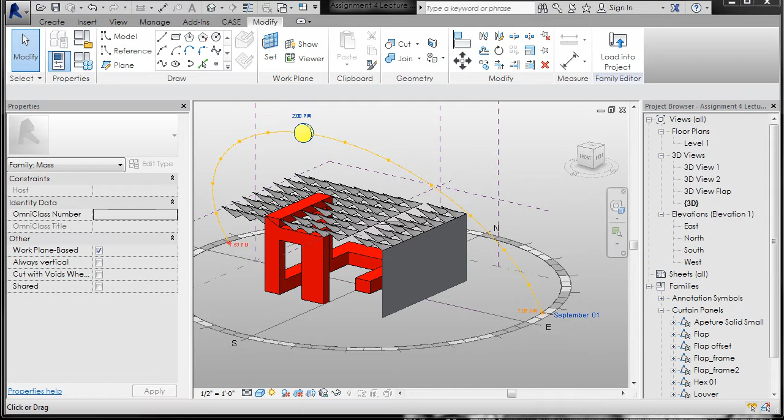So if I select this and go to select that surface, divide that surface, and we'll just divide it horizontally, then I can come into my patterns and I have a louver. Haven't made any types for this one yet.

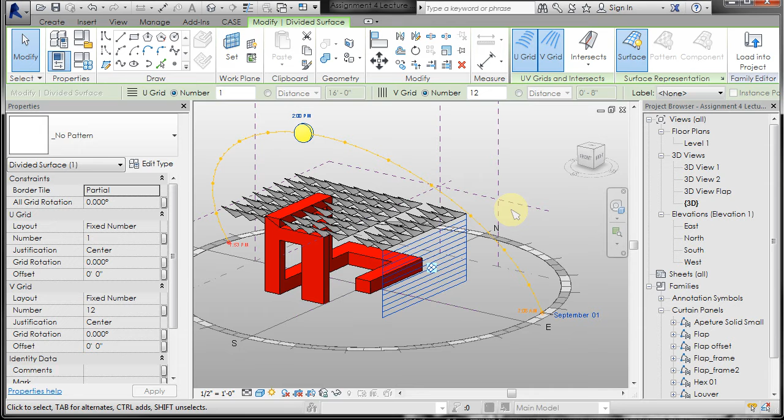And when it comes in, it looks real funny, right? Like I want that louver to go all the way across. And what's happened is it's actually 90 degrees to the way that I want it to be. So it's actually taking this little tiny louver and squinching it up.

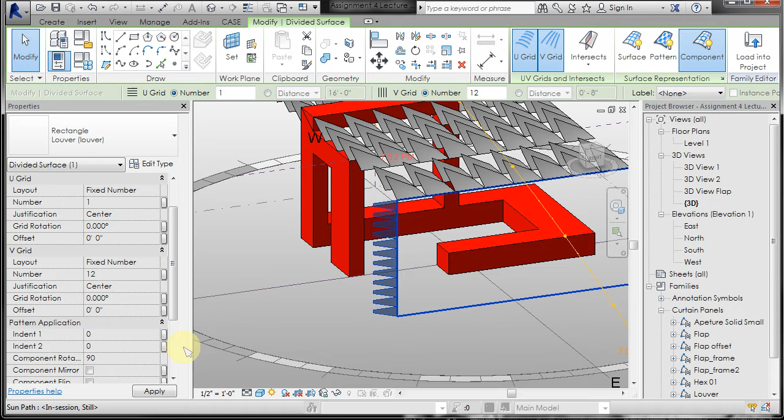But if you have a little faith, you can come over and play oftentimes with the rotation. So if I come into rotation and rotate that 90, you're going to see that that louver rotates itself from vertical to horizontal, and you get this louver rotation.

So if I go to my east elevation, right there is that louver. Let me turn off the shadows and maybe go to a hidden line, which will be a little easier to see.

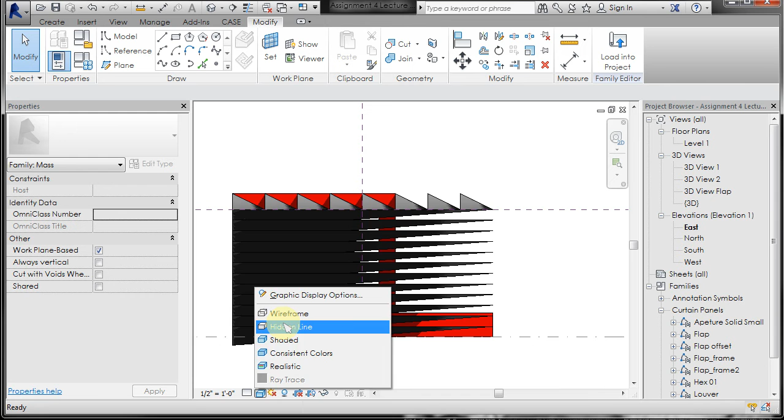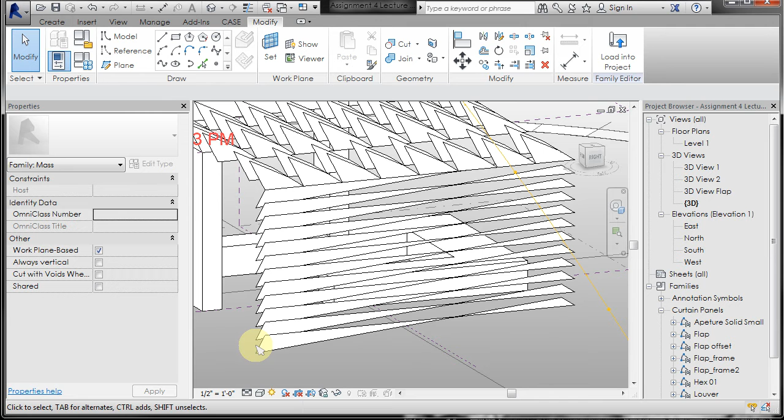So those louvers are spinning. Let's go take a look at it here, and let's go to wireframe, might be a little easier to see, or hidden line. You can see that they're flat here and that they rotate to there, so you're getting sort of the spin on them. So let's take a look at what those guys look like.

If I go to edit type, you see that we've got a -45 spin on a P2 and a 0, and then the length or the width of that guy, the length of each end is at 1 foot 8 inches. So let's hit cancel. Let's take a look at that louver.

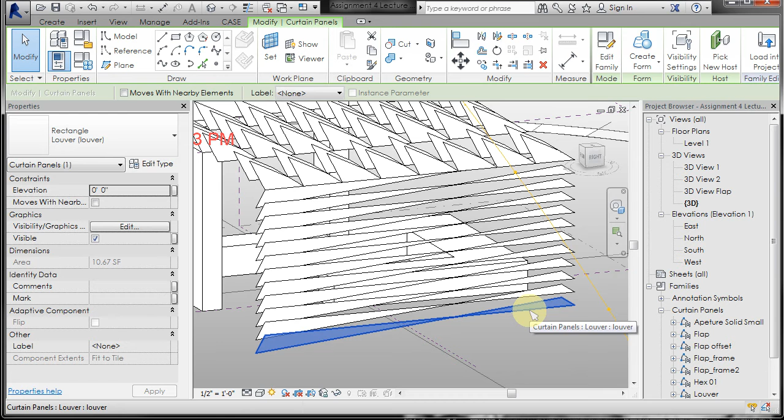So I'm just going to tab select one, right click on it, go to edit family, and it's going to bring up this louver family. And actually it's got a little bit more going on than a little bit.

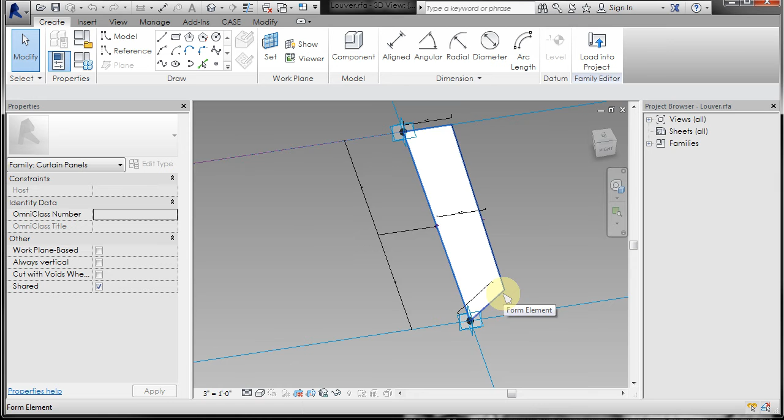What there are is there are two reference points that I've aligned to these adaptive points, and I've drawn lines on them, and you can spin those points by placing an angle parameter on them.

Okay, so I'm going to go ahead and let's just remake this guy really quickly. So I'm going to window around all the stuff and delete it. So we're back to scratch on our rectangle, okay, 10 by 10.

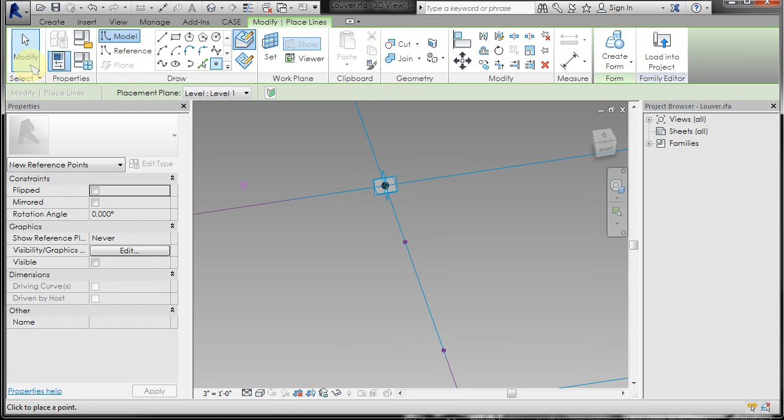So basically what I want to do here is I want to come in and host a couple of reference points on this line. Okay, so basically I got 2 points, right, that are hosted by that reference line, right?

So you can see they're stuck on that line. So what I want to do is I want to pick that point and I want to draw a reference line on it.

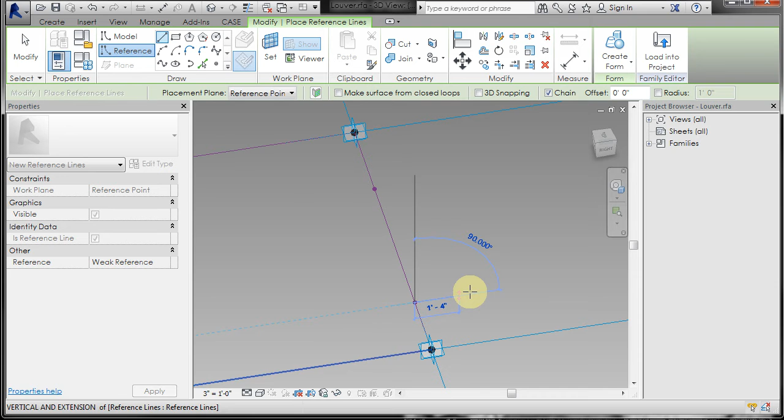And I'm just going to draw it out to the right here. That's not overly important which.

And I'm going to go to set that, and then draw another line out to there. I'm going to pick that line, make that permanent, pick that line, make that permanent, pick both of these.

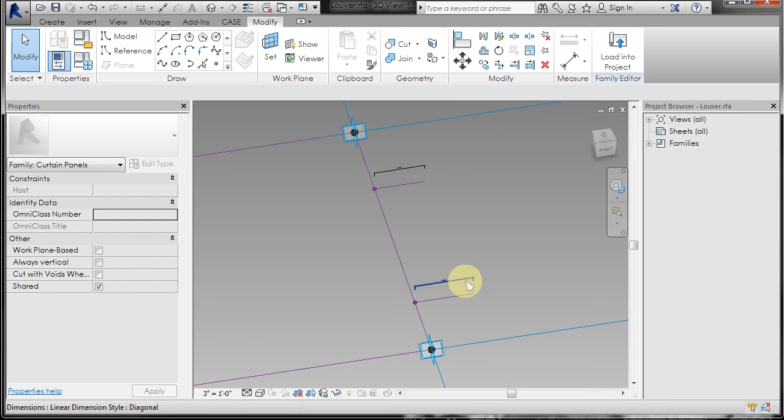And I already have the parameters in here. For length, you can add the parameter. If you don't have it, just call it L, but I'm going to go ahead and pick the parameter that I already have. And it's going to set both of those to that length parameter.

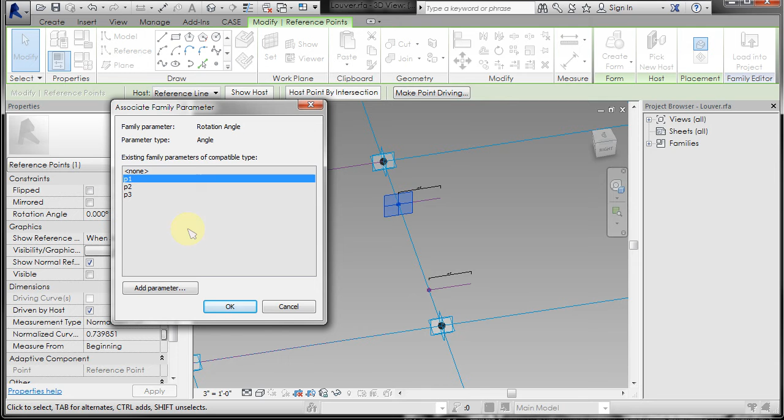Now, these points, if I pick that point, you see all the information it gives me over here. One of the things is a rotation angle, and there is an ability to set a family parameter to that. So I'm going to left click on it, and I already have 3 of them set up. If you don't, you can just click add parameter and give it a name, but I'm going to name this one P1. Click OK, and then I'm going to pick this one, set that rotation angle to P3,

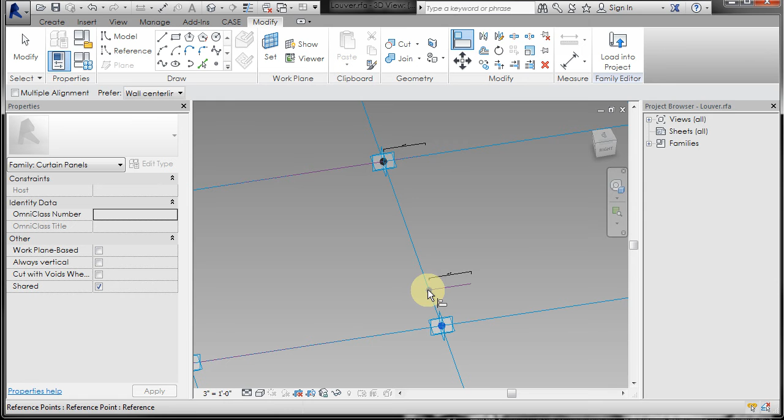and select OK. And then what I'm going to do is align to that point. And I'm going to align to that point. And now I can go in and pick those two and create form, select just the surface, and then I can go in and sort of test these guys. So if I want this to be 2 feet, I can apply those, go out to 2 feet.

I don't have P2 applied to anything, so I'm going to set it to 0, but what if I set this to 35 and apply? You can see that that spins 35. And if I set this one to 25 and apply, you can see that that's spinning to 25. So if I wanted to go negative, I can just hit negative 25 and apply, and negative 25 and apply.

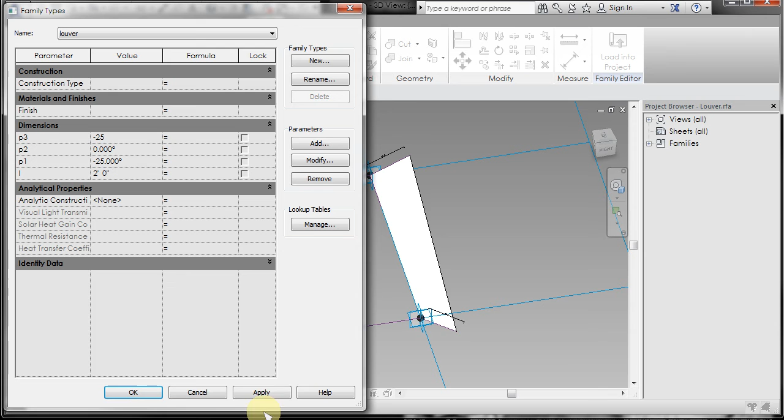Now one thing's a little weird. If I set this to 89 and I set this to 89 and apply, you see how it goes underneath? If I go to 90 and apply, it spins it all the way vertical. So somehow there's some kind of mirroring going on. So if you get into trouble between 89 and 90, then set it at 89.5 because it does some kind of odd stuff with that. So I tend to stay away from 90 if I can help it. But we'll take 0 here and apply.

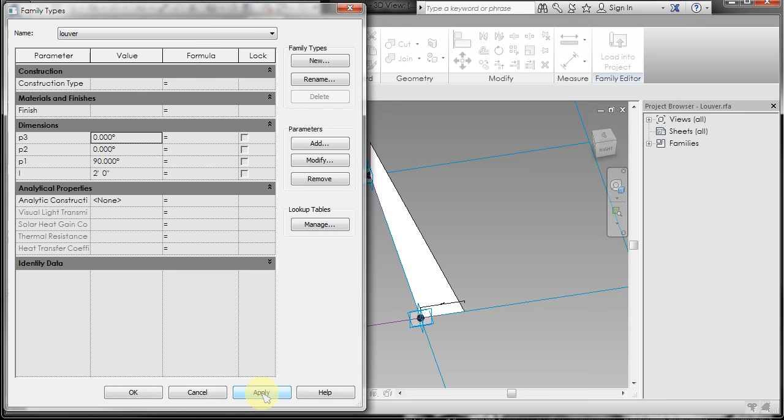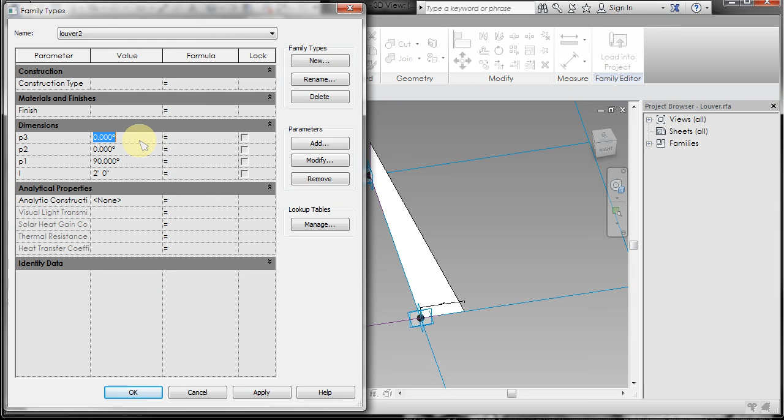Okay. I have louver up here just as a basic type. I could make a new one and call this Louver 2, right? And maybe set this one at 45 and apply. And maybe make it 3 feet. Apply. Click OK. Now I could set a material parameter and a whole bunch of other stuff, but I'm not going to. So I'm going to load this guy into project.

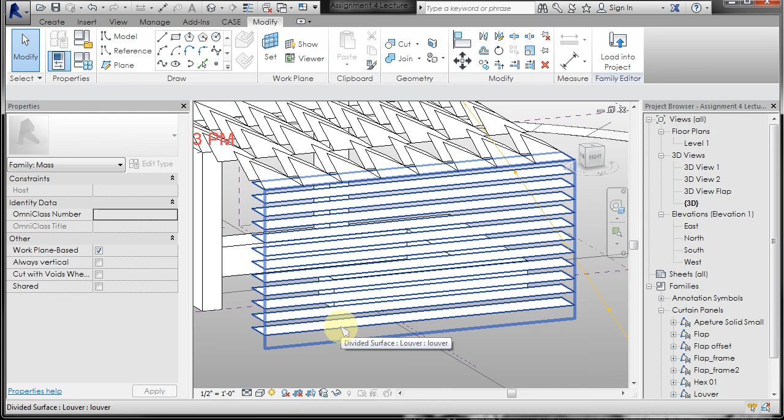Click OK. Overwrite the existing version, and you can see it flattens it out because it's reassigned the points. But let's take a look at it and see. That's louver. We go back here, let's try Louver 2, right? So that's the 3-foot one with the twist in it, which is a little radical.

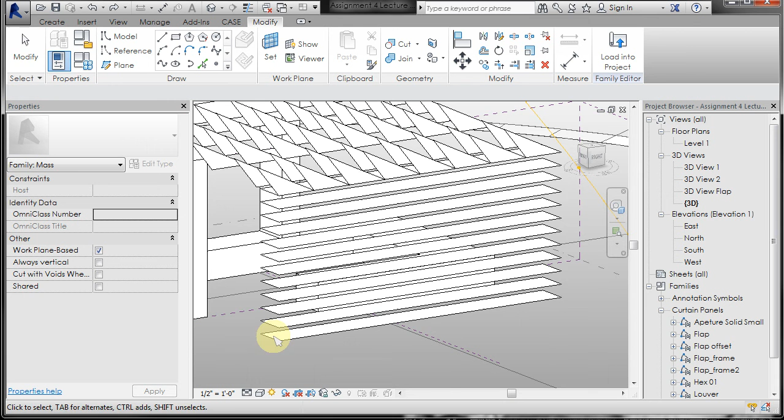If we Control Z out of that and pick this guy and go to edit type, we can set that to 0, maybe set that to 90 and apply and click OK, and you're going to get a twist on that guy, right? Which is pretty radical to 90. That seems a bit much. Maybe

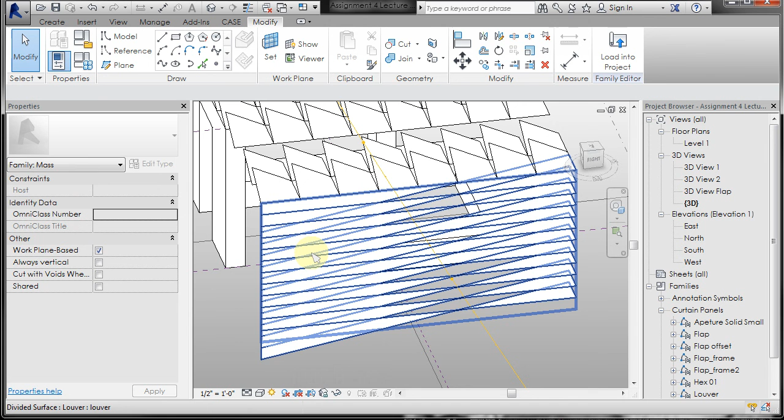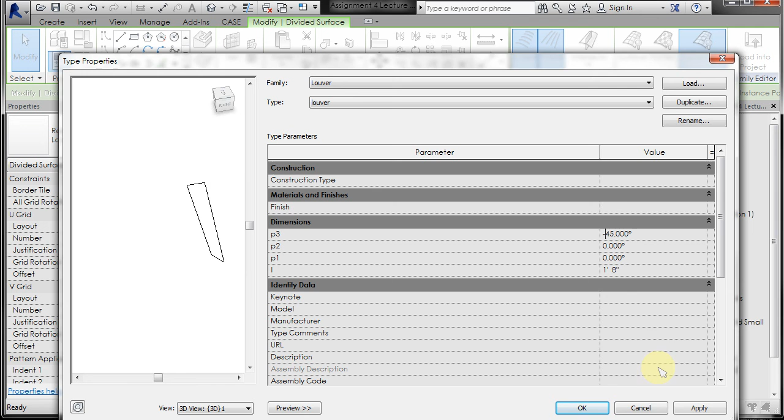we just edit type, and instead of 90, let's go to 45 and apply, click OK. And then the 45 is a little weird because it's going up into that, so maybe negative 45. Click OK. There you go. So now you've got, if we go to our east elevation, you've got that sort of background.

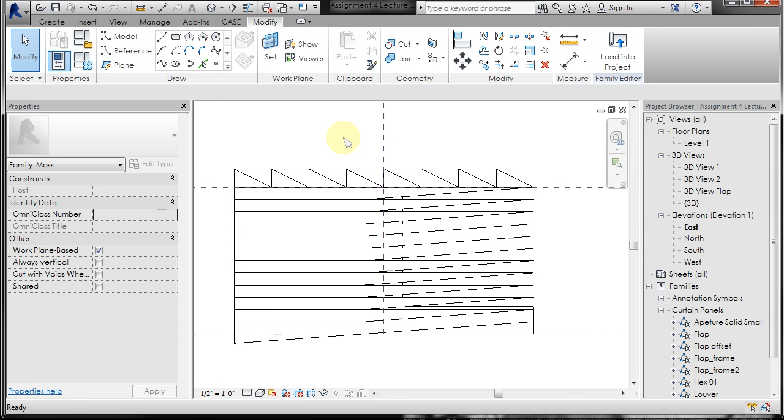We could go to our graphic display, go to background and change it to sky. Click OK. And now you can see that you get more transparency as it spins flat. Alright, so that's it.